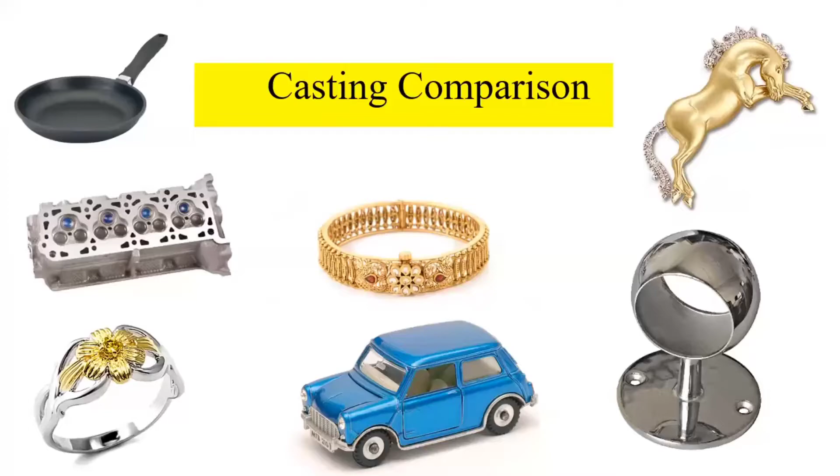We will compare the casting techniques, the casting processes, with other manufacturing processes. So we have the basic question: why do we prefer casting techniques over the other manufacturing processes? We have several reasons due to which we prefer casting techniques, the casting processes, over the other manufacturing processes.

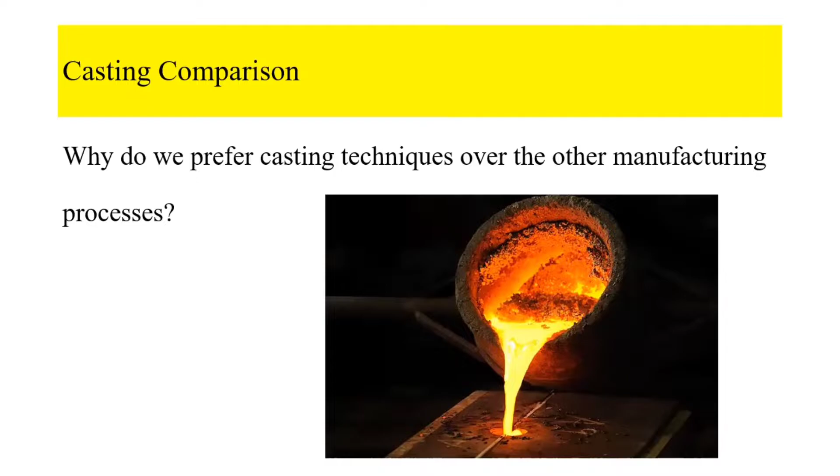Number one, when the part or the product to be manufactured has a large internal cavity, then we will prefer the casting process, the casting techniques, for its manufacturing. Examples include the industrial parts. We prefer casting to manufacture these parts with large internal cavity or cavities to avoid the wastage of material.

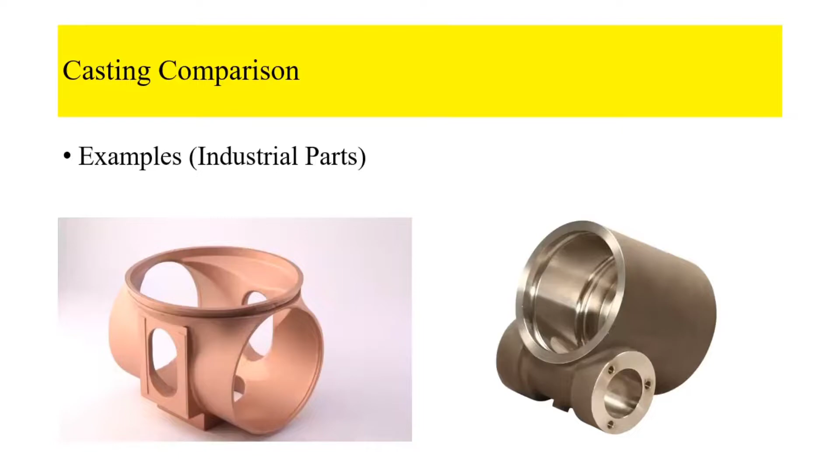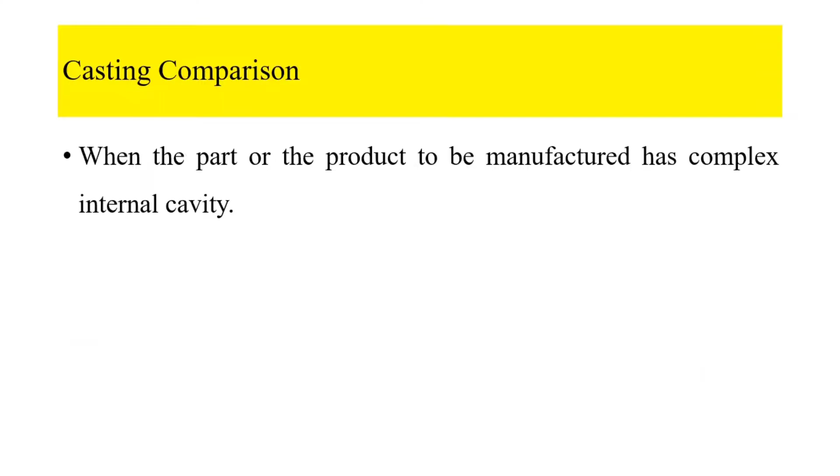Then, when the part or the product to be manufactured has complex internal cavities, then we will prefer casting for the manufacturing of this part, because the other available manufacturing processes cannot be used to fabricate these complex internal cavities. The example is the carburetor of the automobiles.

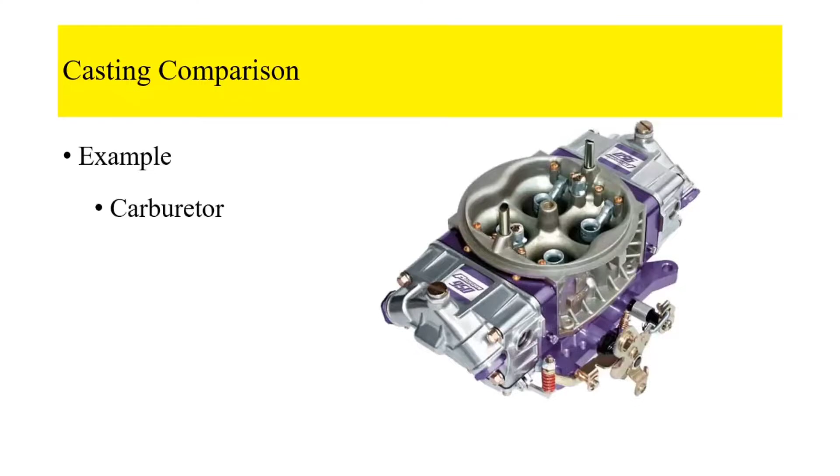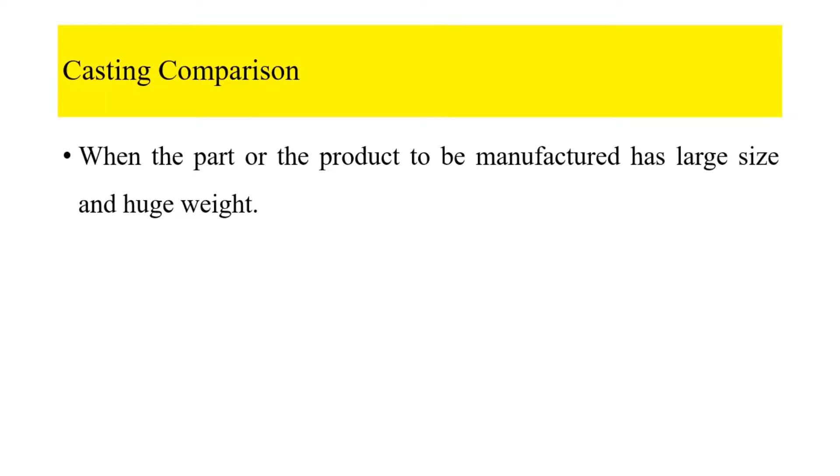Then, when the part or the product to be manufactured has large size and huge weight, then we will prefer casting for its manufacturing. For example, the structures of machine tools like the bed of the lathe machine, the column of the milling machine, the column of the drilling machines, all these structures of the machine tools are manufactured with the help of casting processes because these are the parts or the products with large size and heavy weight, and they are difficult to manufacture with the help of other available techniques, the manufacturing processes.

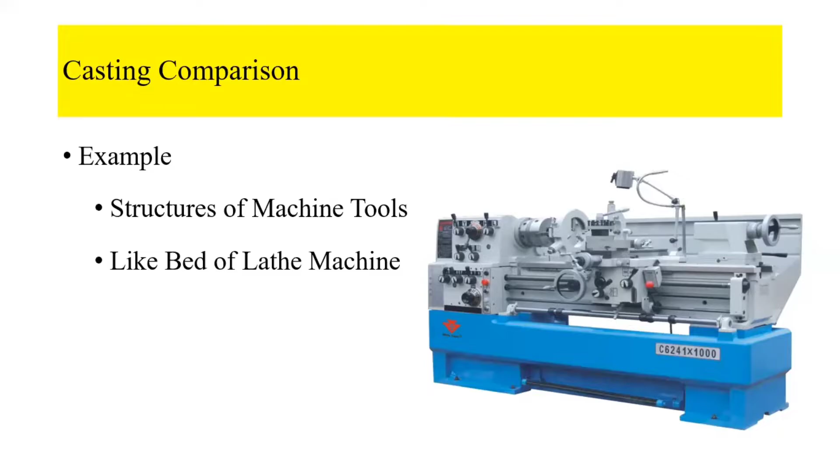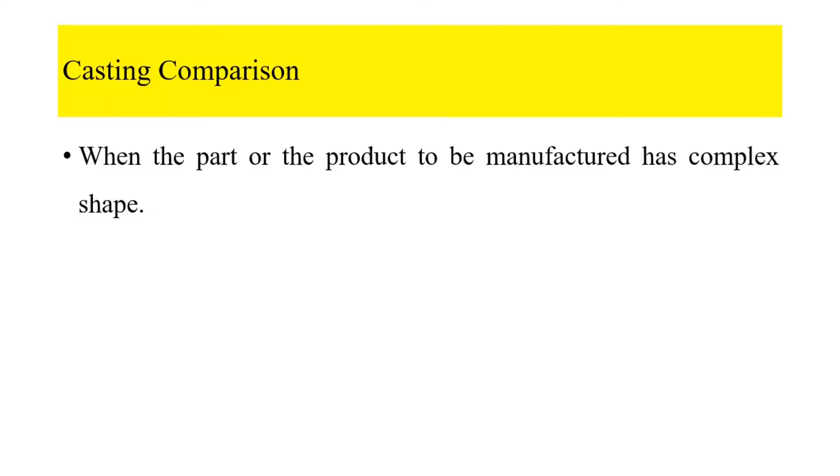Then, why do we prefer casting techniques over the other manufacturing processes? When the part or the product to be manufactured has a complex shape, the outer shape of the part or the product is too much complex, and with the help of other available manufacturing processes, it is too difficult or impossible to fabricate these shapes. For example, the engine block.

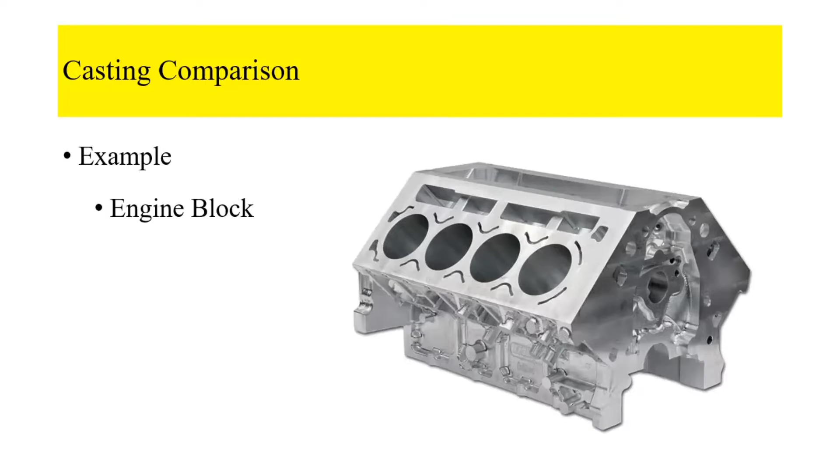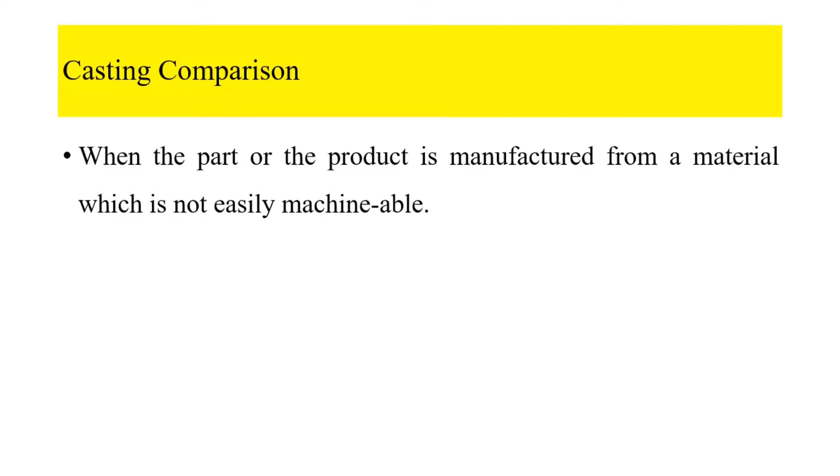Then, when the part or the product is manufactured from a material which is not easily machinable, because the material is too hard, then definitely we will prefer the use of casting processes, where the metals, the alloys, are melted into molten form and poured into the mold cavities to manufacture the parts or the products. For example, stainless steel and titanium are metals which are difficult to machine. Titanium is used in the manufacturing of some of the parts of fighter jets.

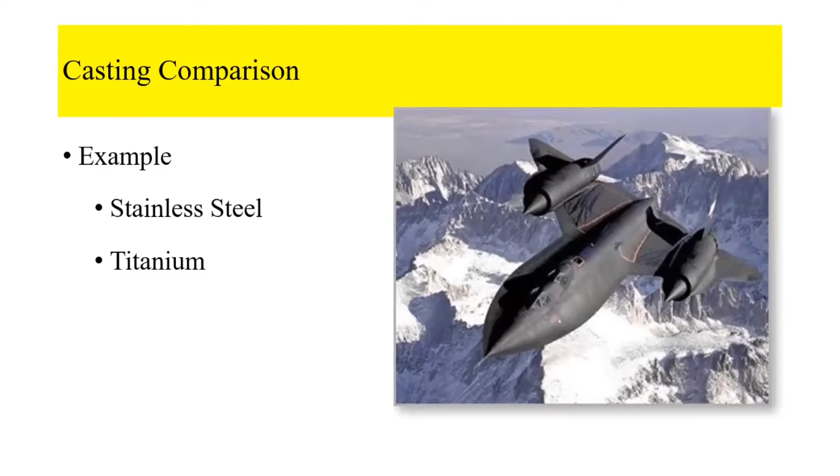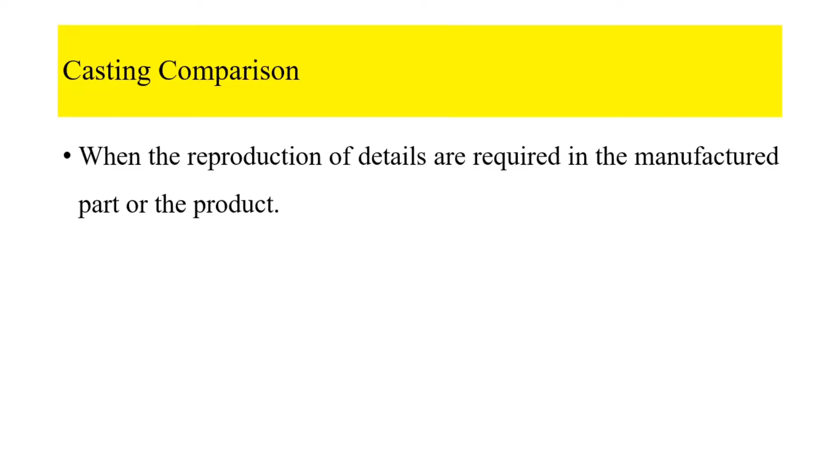Then, why do we prefer casting techniques over the other manufacturing processes? When the reproduction of details is required in the manufactured part or the product. For example, if we want to manufacture a part or the product and it has very minute details, very small details, which are very difficult to fabricate with the help of other available manufacturing techniques, then definitely our preference will move towards casting.

Examples include dinky toys, and these dinky toys include a lot of little details, and the fabrication of these smaller details into the final part or the product is known as the reproduction of details. For example, the manufacturing of statues, because small features are also included in the statues.

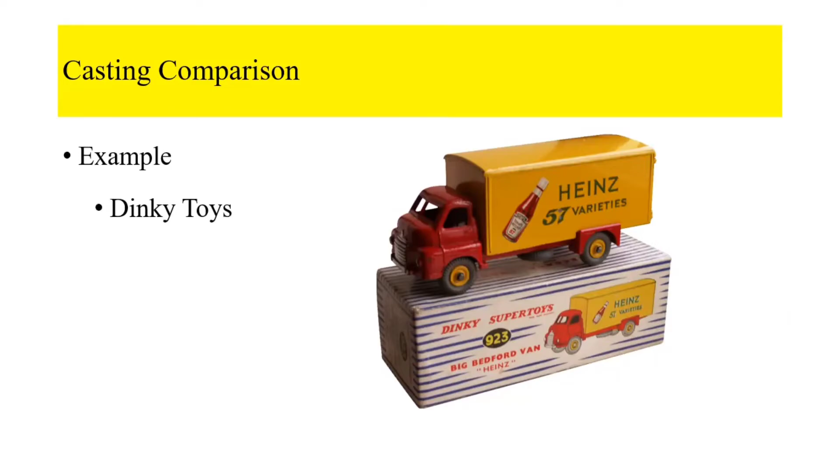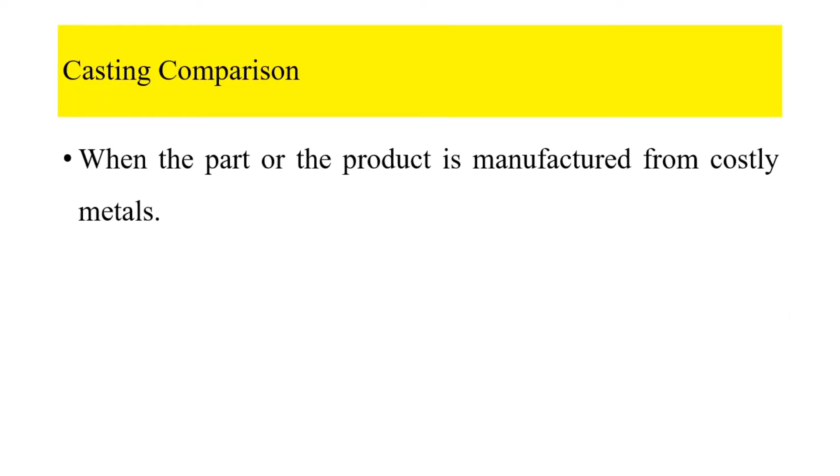Then we prefer the casting techniques over the other manufacturing processes when the part or the product is manufactured from costly metals. The metals used for the manufacturing of parts or products are too costly, and we cannot afford the wastage of these metals. For example, gold and silver. So in the manufacturing of jewelry, we use the casting process, the investment casting process.

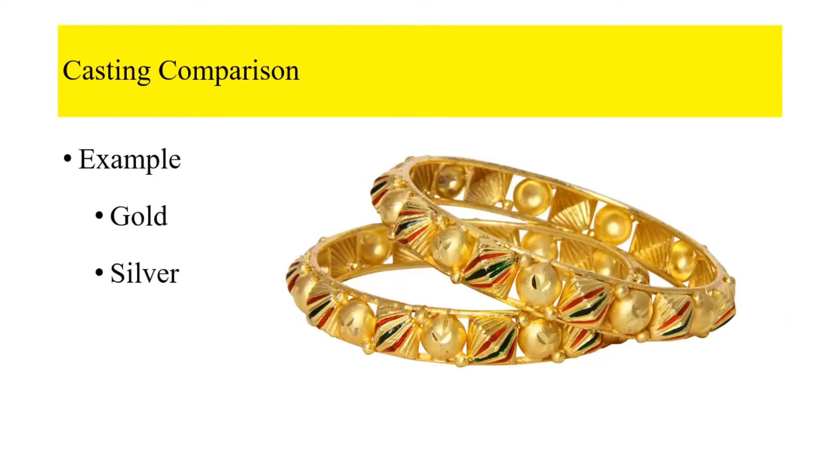The last reason to select the casting techniques to manufacture the parts or the products is if we want to manufacture the parts or the products with minimum directional properties. Some of the materials inherently have anisotropic behavior, meaning their mechanical properties and other properties change with the directions. The material has different properties in the x-axis, in the y-axis, and in the z-axis.

And also, anisotropic properties are introduced into the materials because of the processing operations. For example, the bulk deformation processes, such as forging and rolling, also produce directionalities in the fabricated parts or products. So if we want to minimize these directional properties and manufacture the parts with isotropic behavior, meaning their mechanical and other properties do not change with the directions, then we have to prefer the casting techniques.